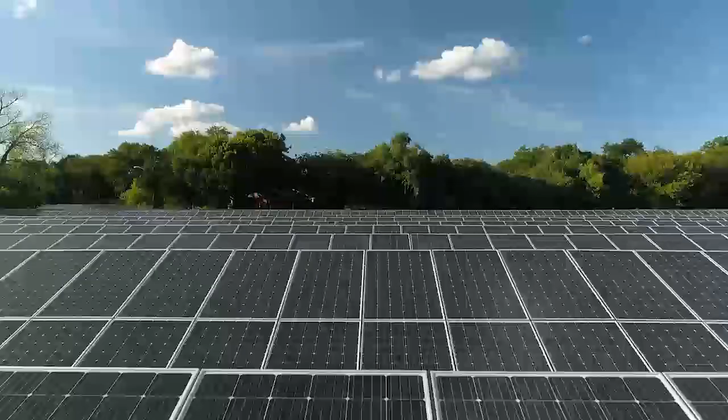In the UK, we have committed to reducing CO2 emissions by 100% by 2050. It's a massive challenge, and now more than ever, we need innovation to drive change. Hydrogen is an absolutely vital part of the plan. In the heart of the Midlands, a pioneering energy demonstration is underway.

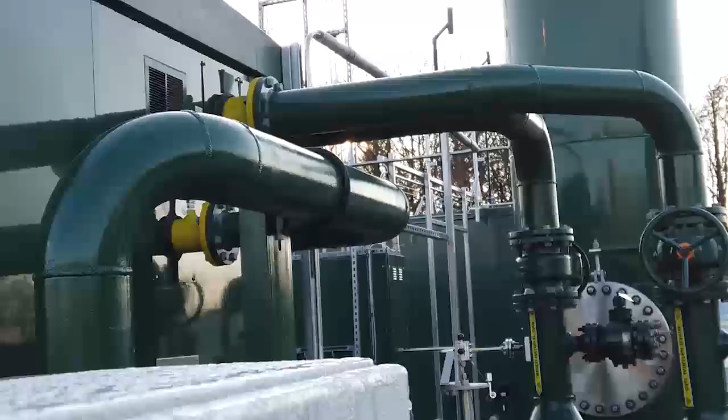When hydrogen is burnt, it doesn't produce any carbon dioxide emitted into the atmosphere, but it still produces heat and energy. A third of the UK's carbon emissions is from heat, and that, to this date, has been hard to decarbonise. We're going to use hydrogen in the gas network.

What we're trying to do at Keele is put 20% by volume of hydrogen into the network. Essentially, the evidence base has now been developed and assessed by HSE to conclude that it should be no less safe when blending hydrogen with natural gas than it is where we distribute natural gas today.

23 million customers in the UK are already connected to the world gas network that we have in the UK. From an infrastructure perspective, it makes a lot of sense to decarbonise the gas which is within the network already. If a hydrogen blend is distributed across the whole of the UK, that's the equivalent of saving 6 million tonnes worth of carbon, which is proportionate to taking 2.5 million cars off the road.

When we look at net zero, there's going to be a number of options open to us, from electricity to pure renewables and green gas. All have got a part to play. This isn't a competition between electricity and gas. The CCC report was absolutely clear: in order to hit our 2050 ambition, we need to move on all fronts, and we need to move now.

It doesn't matter how good the technology is, because in the end it will sink or swim with the public acceptability of it. And the majority of the participants in our study have actually been really proud to be part of the project.

Sustainability is a key overarching strategic aim for Keele. We try and embed it in all our activities, in our research, our education, across the campus, the community, and in our external and business engagement, aiming to be a genuine sector leader in low carbon sustainability. And HyDeploy aligns incredibly well to all of that.

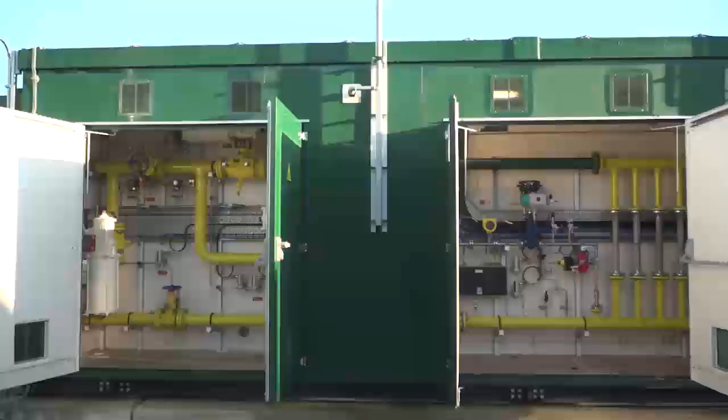Firstly, what we do is we produce the hydrogen via the electrolyser, and in the electrolyser we have water, so H2O, and also electrical current. The electrical current will split the water into hydrogen and oxygen. The oxygen is vented into the atmosphere, and the hydrogen is then transported into the buffer tank where it is stored, and then from the buffer tank it goes into the grid entry unit. In the grid entry unit, the hydrogen is mixed with the natural gas and then injected into the gas network, and then once it's in the gas network it goes to a governor, a pressure reduction site, and then into the wider Keele network.

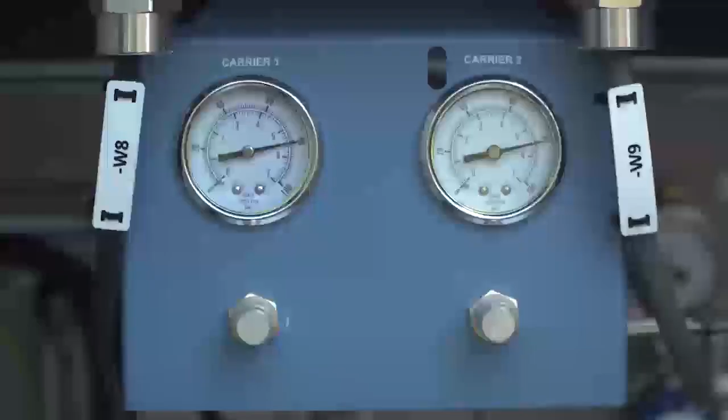This behind me is a gas chromatograph. We've positioned this at the extremity of the network. Its purpose is to measure gas composition, so by having it at the extremity, we can make sure that there's still hydrogen within the network at the correct volume.

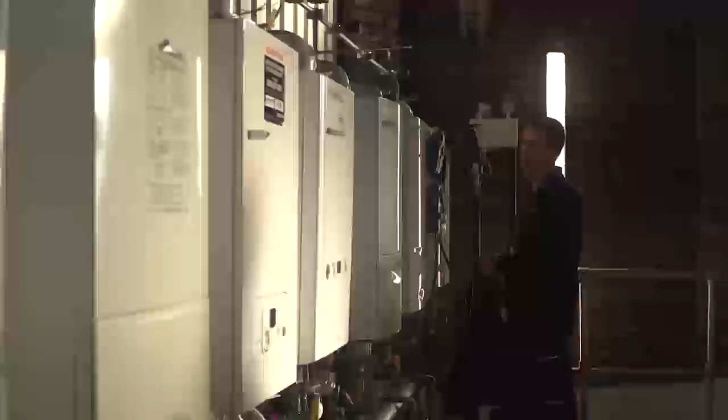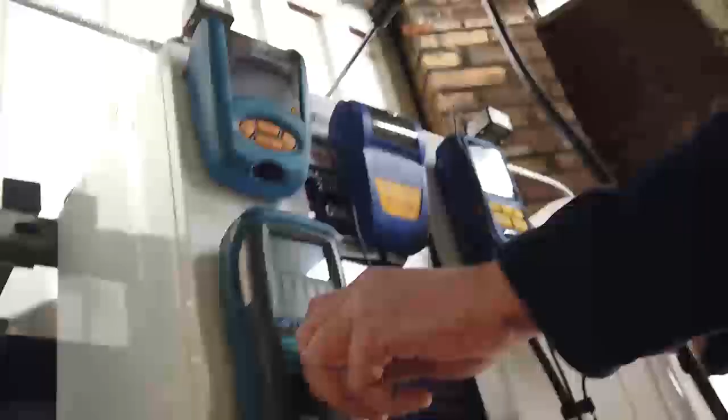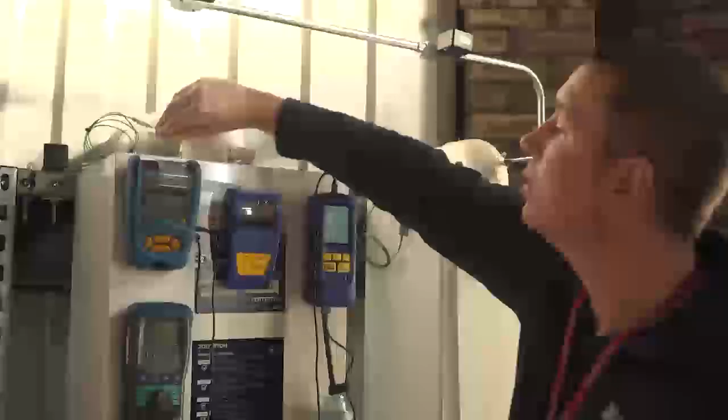We also have support from the boiler manufacturers - Worcester Bosch, Vaillant, Ideal and Baxi. Between them they've provided 8 boilers. One boiler from each manufacturer is operating on natural gas and one is operating on the blend. We're running those boilers very hard to represent long life operation, which allows us to make important tests and checks on those boilers as they're operating.

I feel really excited about taking part in the HyDeploy demonstration. It's a really good project to be part of, and it's especially good to be able to support it in the comfort of your own home. I've not noticed any difference using the blend in my home. For cooking and for heating, it all is absolutely normal, and you'd even barely notice it was there.

The next stage is to scale this up. It's about doing it at a small scale, making sure we've got all of the wrinkles ironed out, and then we're going to start deploying it into the communities in a year's time, and that's hugely exciting.

The main benefits of HyDeploy North East after the project at Keele is that we are repurposing the equipment. We're reusing the hydrogen production equipment, the hydrogen grid entry unit, and we're taking what we've learned and repurposing that for the trial in the North East.

Because HyDeploy is an innovation project, it's fairly new territory. So the learning that we've taken from Keele with regards to our customers and what it is that they want from us in a project team will be crucial when we go into the next phase and next demonstration project.

What we need to do is address the evidence gap that we have following Keele and then following the North East trial, and then we can cover that in the North West. By the end of that 6-year period, we're looking to be at a position where we can then roll blending out across the UK. It is a pragmatic step to the transition to a hydrogen-based economy.

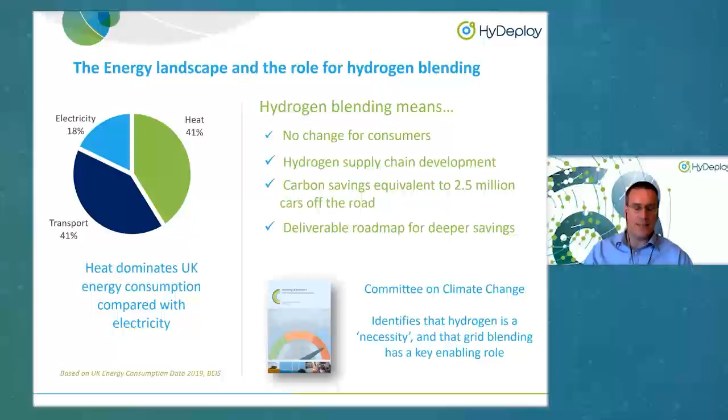So if we could have the next slide, Peter, that would be great. So the objective of HyDeploy is to enable bulk deployment of hydrogen blending in the UK gas network by demonstrating its safe transportation and use.

So today we have biomethane being injected widely into the gas network, and we're looking to have the same kind of situation with hydrogen. It's been configured as a series of public demonstration projects.

The first one is on the private Keele network. Because Keele run their own network, we have a controlled number of households - around 100 households and 30 commercial type buildings, whether it be lecture theatres, offices, or refectories. Good site for us to do that initial demonstration, which we then roll into the public trials as was indicated in the video, and we'll pick that up at the end of this presentation.

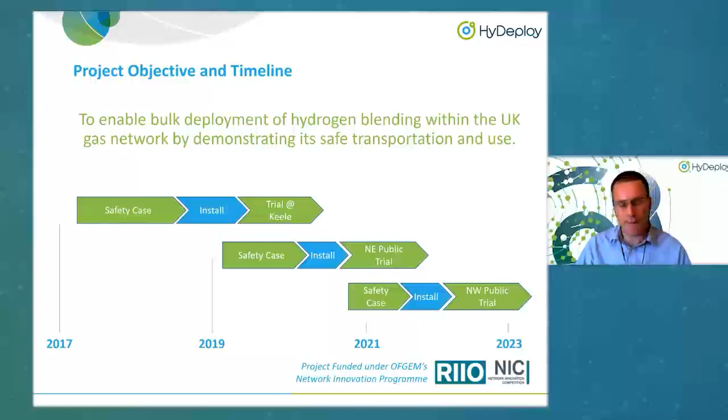A key part of the whole programme has been to establish the safety case for us to be able to do that. In the UK, the quality of our gas grid is controlled by the gas safety management regulations, which stipulate that we can only stay below 0.1% volume hydrogen in the gas grid. So we needed an exemption - a process which has been done before, as it's how we allow aspects of biomethane quality to be injected onto the network.

In order to secure that exemption, we need to demonstrate that persons affected by it won't be prejudiced. So we needed evidence to demonstrate that 20% volume hydrogen is as safe as natural gas, and we did that by building a quantitative risk assessment backed by rigorous evidence.

Using that evidence, we modelled the UK network, then translated that into what the Keele University gas network looked like prior to the trial, and then during the trial. Through that comprehensive evidence base, we demonstrated and secured that first hydrogen exemption in November 2018. If we could have the next slide, that would be great.

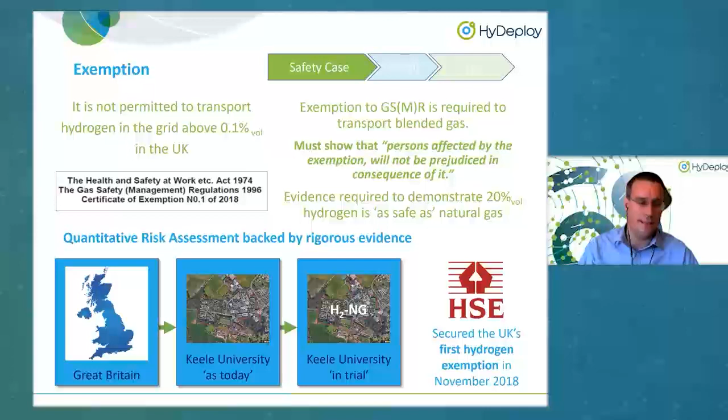A real important part of this has been our customer focus, and Zoe will tell us more about that later. We needed to ensure customers understood and were on the journey with us to blending. We also needed to undertake important safety tests in people's homes, checking the quality of their installation on natural gas and the quality of their appliances. We even tested using bottled gases at Keele to ensure a good solid evidence base, and it gave us that important opportunity to engage with customers and consumers at Keele University.

So following the exemption, if we can have the next slide, we then proceeded to the installation. Here are just a few photographs of that installation process starting November 2018 and finishing in October last year.

You can see on the top left the initial foundations, and then the next photograph shows the factory acceptance testing of the electrolyzer. The next one is when we were testing the grid entry unit, which we did on NGN's Low Thornley site, providing an ideal place to test prior to moving it to Keele. Then you see a series of photos as we moved and installed the equipment at Keele, including some of the equipment out on the network, which we'll talk about later.

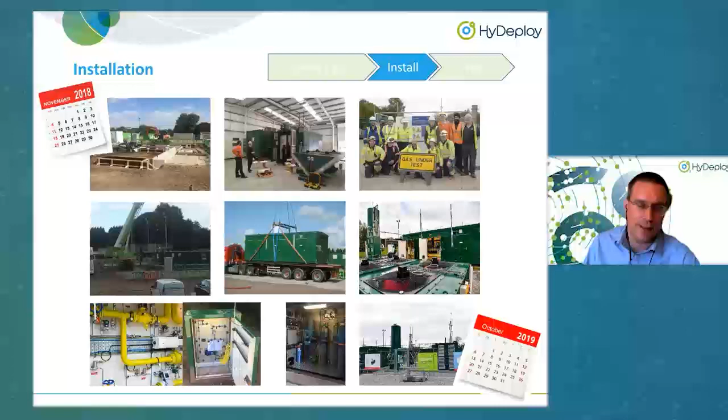Finally, you can see the full installation completed in October 2019 - in just under a year, we achieved that full construction. Here is a photograph of an aerial view of the compound.

If we go around clockwise, you have the transformers bringing in power to the power supply unit, which is then connected to the electrolyzer using renewable electricity. That then produces the hydrogen. As indicated in the video, that goes into a small buffer tank so we can manage supply and demand of hydrogen, which is then drawn in by the grid entry unit. The grid entry unit takes natural gas from the network and blends in the hydrogen.

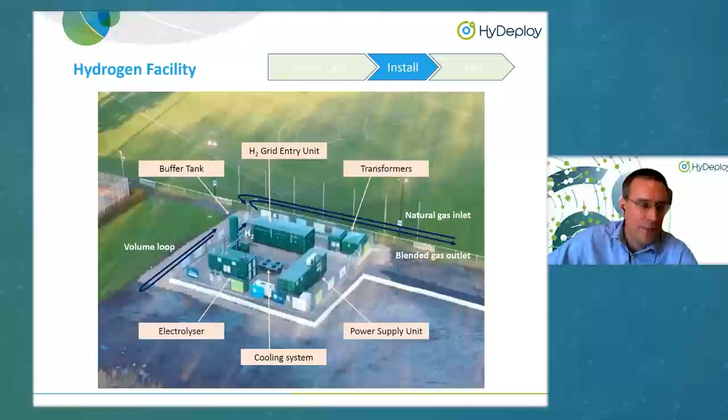And you can see we have this loop called the volume loop, which allows us to test and check that we've met our blending criteria before that gas is then released out onto the gas network at Keele.

Next slide, please. So, at the end of October last year, we became the UK's first gas network to operate on a blend of greater than 0.1% volume hydrogen and natural gas. Obviously, in the past we had operated on town gas, which included hydrogen, but this is a blend of hydrogen and natural gas.

Now, in order for us to carefully increase the blend level in a controlled process, we had a series of checks. This gives you an idea of the kind of things we were doing out on the network - we needed to make sure the compound itself was operating as expected, that the governor was operating as expected, and that measurements of gas composition across the network matched what we injected at the front end.

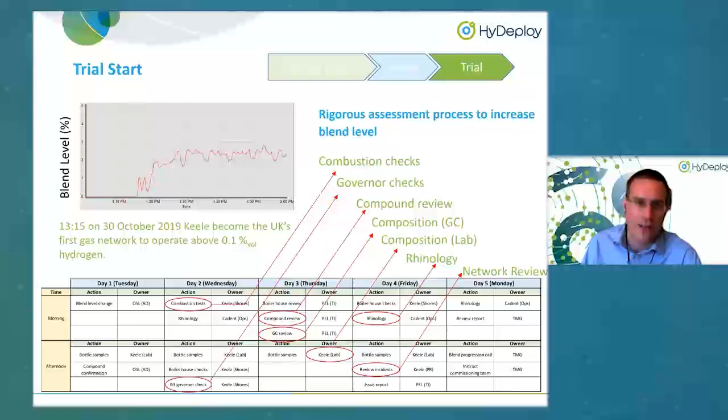So we had a network measurement point permanently collecting data deep into the network, as well as taking laboratory tests. Gas, as we know, has a characteristic smell, which is really important in leak detection. We needed to make sure the rhinology, that leak detection smell, was still as we expected. And we needed to make sure the network was all operating as normal, and finally, that all the appliances out on the network are operating as required. So we went through that process.

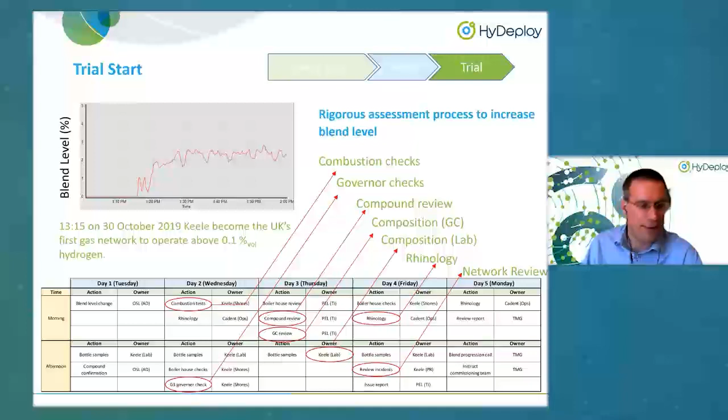Now, this has been more challenging than we expected. Nobody has ever tried to balance a blend into a network before. So we've made very good progress. We're looking forward to increasing that blend level further from the mid-teens that we're at, as soon as the restrictions from COVID-19 allow us to be blending again. But we've made very good progress.

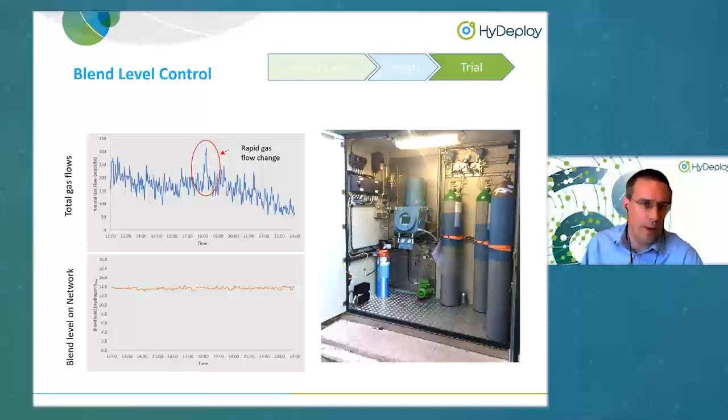Again, we've had some challenges in the production of hydrogen, making sure that that is consistent too. But together, we have made huge progress, and we look forward to starting again once COVID-19 allows us to do so. If you can move to the next slide.

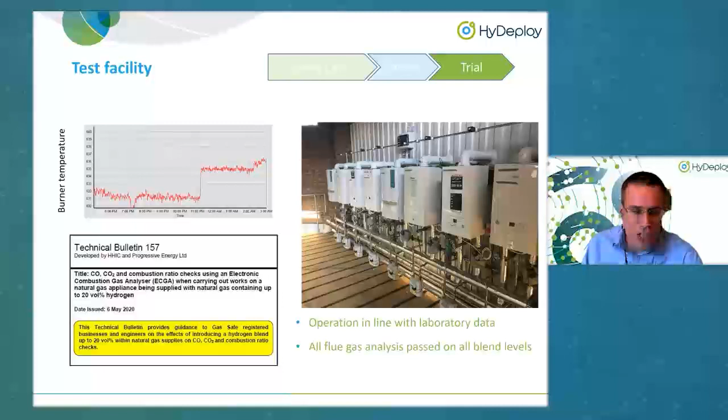And again, you saw in the video that we had the boilers that were hanging on the wall. Those are in addition to all the domestic boilers that we have in people's homes. These are boilers that allow us to take a much greater set of tests along with the manufacturers. And you can see here in one of the graphs, which demonstrates when the blend was being turned off, we have a burner temperature which is way up in the 600s, and you can see just a few degrees, but you can see the step change when the blend level changes.

Now, we were able to collect data from that, which has allowed us to put technical bulletins out into the gas safe industry to show that actually their normal processes, the way they measure flue gas composition, can carry on just as normal when we're running with a blend as they are with natural gas. And this is the heart of the project, that business as usual can carry on whilst we're adding the blend in and reducing the carbon intensity.

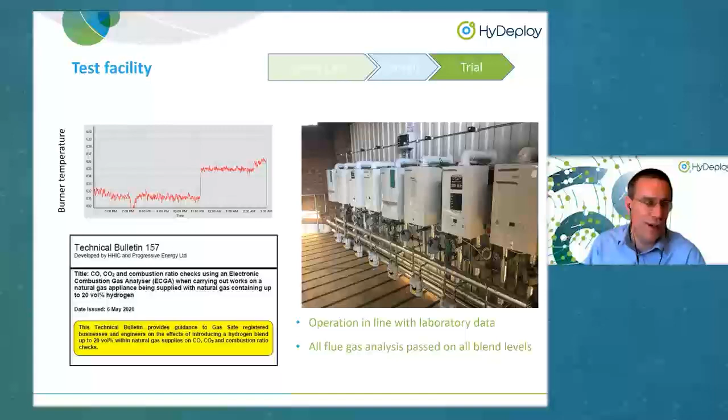Could I have the next slide, Peter? So again, as you heard in the video, this is the first trial. We are then looking to roll out into a much greater number of properties. So our first trial in the northeast, which is being hosted by NGN, will go into over 600 properties in that area. We've already been and done gas safe checks there, and we are engaged with the community there.

And in fact, the construction of that compound to deliver the hydrogen is already well underway, and we look forward to being blending into that network later on this year. And that's the first, followed by a subsequent trial, and then we roll into deployment.